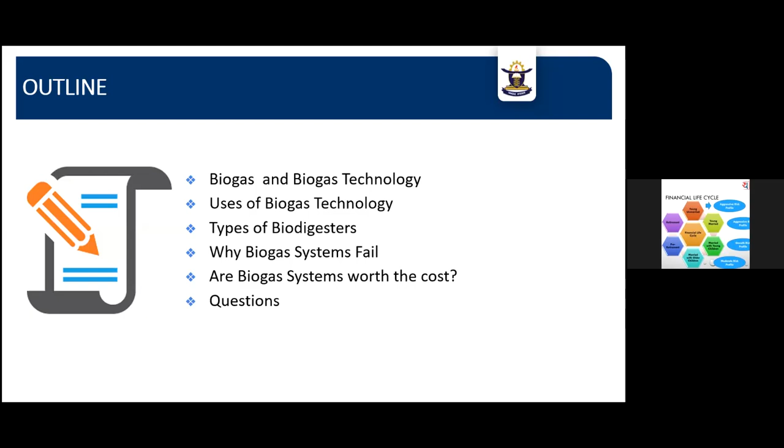And then we also want to see whether it is really worth it to put money into these systems, either as individuals or domestic users or as commercial users. These are some of the things that we'll touch on briefly today. So when we say biogas, what is it? Basically, as the name suggests, it's a type of gas that is produced from biomass. Bio represents biomass, and the gas means a gas that is produced from biomass.

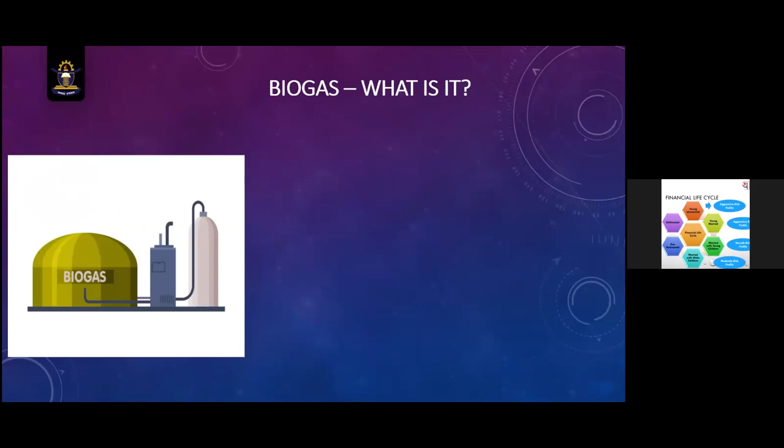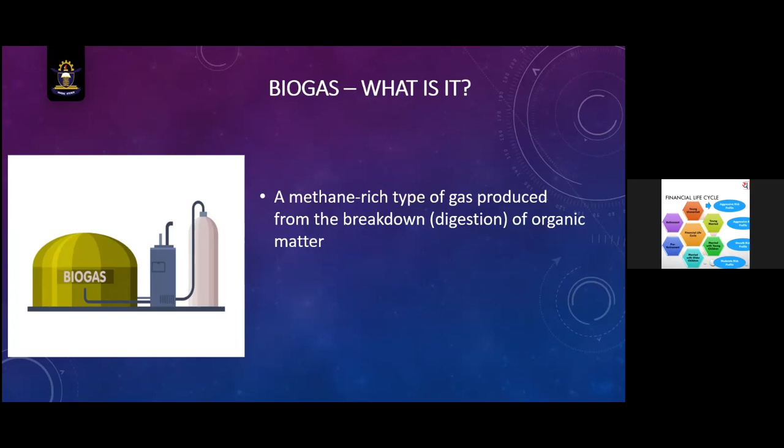Basically, it is a methane-rich gas produced from the breakdown, or what we call the digestion, of organic matter. Please pardon me for those who may not know methane. Methane is a hydrocarbon; those of you with a chemistry background would know that it contains 1 carbon and 4 hydrogens in single bonds (CH4). So it's a very rich gas that is used for combustion and a lot of other chemicals.

Naturally, biogas is colorless, and one of the quickest ways to ascertain the presence of biogas is the smell, a rotten egg-like smell. So normally where you have biogas, you have a smell similar to that of a rotten egg. Because it's colorless, you cannot see it. Naturally, God has made it possible for us to detect the presence of the gas through the smell.

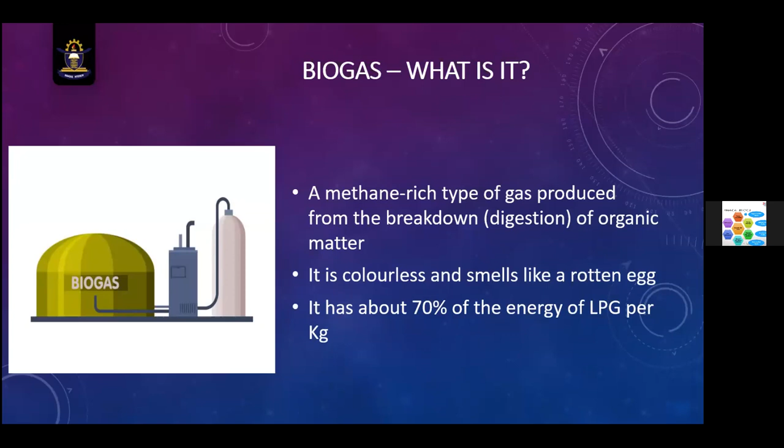If you compare it to LPG, with a very rich biogas that contains about 70-75% methane, the energy content per kilogram is about 70% of that of LPG. So it's a good gas that can serve a lot of energy applications for us. How is this produced? Before the webinar, I saw that Engineer Mubarak was playing a video, which is quite interesting, showing exactly how biogas is produced. But I would just want to break it down a little bit.

The process is actually a chemical process, or in quotes, a biochemical process. And so it involves several complex chemical reactions. I won't go into all of this. Laymanly, we'll say that it's produced when some group of microorganisms or bacteria break down organic matter.

And so when organic matter digests in the absence of oxygen, so we want the digestion process to happen where the environment is inert or where there is no oxygen, then the product of that process will be a gas and some other materials. So the gases that are produced, like I said, would be methane gas. You have some carbon dioxide, sometimes even some carbon monoxide, and other traces of gases, depending on the composition of the material or the biomass material that you have.

For us, for the purposes of using it for energy, we are interested in maximizing or optimizing the production of the methane gas, which is the key ingredient in there that is responsible for its energy application.

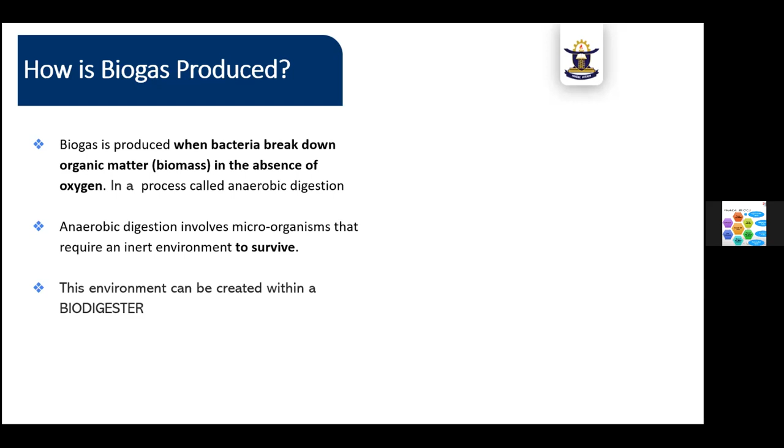So it's important that you create an environment that is what we call inert, or that is oxygen free, for the microorganisms responsible for the breaking down of the biomass to be able to do their work very well. And so normally this environment is created in a system that we refer to as a biodigester. And so the biodigester is just a reactor or a kind of container designed in such a way that air will not be allowed to enter, more or less, so that we can have the process of the digestion happening.

So typically, this is a typical digester that is usually buried underground. Of course, the reasons for all of this will be known later. So this is a very typical digester. So basically what we have here is just this portion of it.

Sorry, I don't know what I can see. Where's my pen? Yeah.

Okay, so this portion of it will contain our biomass, and it's designed in such a way that there will not be any oxygen entry. Okay, so as you can see, we have the digester itself with other ancillary parts or auxiliary parts. So we'll go into the details of this later on.

Now, the process involves a number of chemical reactions, as already indicated. And just to summarize what happens in there, if we take any typical biomass, we know that any typical biomass will contain some carbohydrates, some fat, and some proteins. And so there are about 4 different stages or 4 different kinds of reactions with unique or specific microorganisms responsible for each of these activities.

So we have the hydrolysis part, where we have the breakdown of the complex or the larger molecules to slightly smaller molecules, which are further broken down into smaller molecules, until we get to the methane, carbon dioxide, and then the other traces, where we have more or less almost complete reaction happening. So this is exactly what happens. But we are not going to go into the chemistry of this. Perhaps we can have another session discussing all of these quite complex processes happening here.

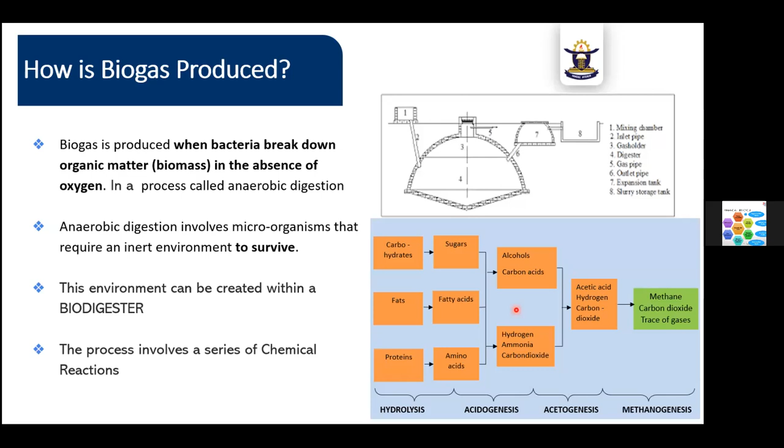All right. So what are the uses of the technology? Typically, the anaerobic digestion process is used for basically 2 things. One, you can use it to produce gas. If the production of biogas is the main goal, then it can be used to produce biogas. You can also use that same process as a waste treatment process. Okay, so you can use the biogas technology or the anaerobic digestion technology to produce biogas or to treat waste.

In fact, they happen together. They are not mutually exclusive. So what happens is that whether you want to treat waste, the biogas will be produced. Whether you want to produce biogas, some waste treatment will happen. But depending on your focus, you may design the process in such a way that you optimize one. Like I said, if the object is to produce a lot of gas for cooking or for energy application, then

you want to design your process in such a way that the production of gas is optimized. If it's for waste treatment, then you want to have a way that the pathogens within the biomass or within the substance that you want to treat are given the appropriate conditions to be killed or made inactive in whichever way you want.

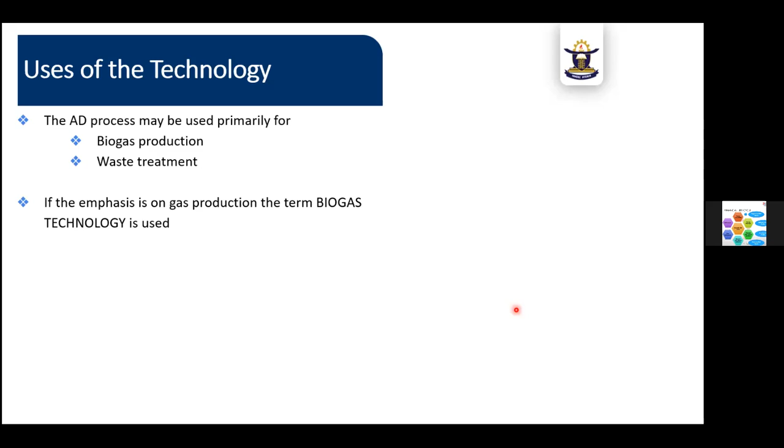So if the emphasis is on production of gas, that is where normally the term biogas technology is used. Biogas technology is one of the terminologies we use openly, and this resonates very well with systems that are used with the intent to produce some gas for further applications. If it's for sanitation or waste treatment, you may hear terms like anaerobic waste treatment technology, or anaerobic treatment technology. So they are all the same.

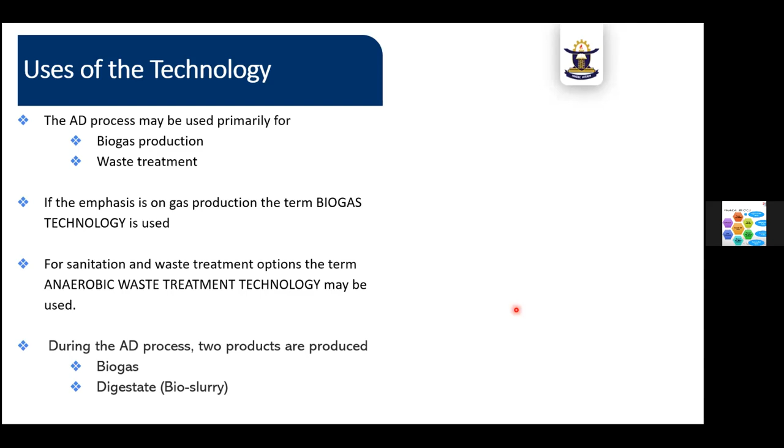Whichever technology you want to use, it is still biodigesters that are doing the work, depending on what you want to produce. During this process, you produce a gas, and then you produce what we call the bioslurry. The sustainability of an anaerobic digestion process is increased when you are able to make use of these two products. One will be the main product, one will be the byproduct. If you're able to make use of all of this, then you are closing the cycle. You are ensuring that nothing goes to waste.

So typically, assuming we produce some biogas in an anaerobic digester, you can use the gas in a biogas generator to produce electricity without any further treatment, maybe just removing some unwanted materials through filtration or absorption. You can use it to cook also. You can just burn it in a biogas stove, and voila, you are good to go. You can prepare some meal with it if you have enough gas. So you see the heat application also here.

Of course, in advanced countries or in advanced utilization, we can further refine it for various applications. You can use it even as fuel for transportation, for the generation of electricity and other chemicals. So there are very advanced usages as well. That will require some further processing.

And then, of course, the slurry or the digestate that I talked about can also be used as a very good soil enhancing material, or as a fertilizer. Many people will call it the biofertilizer. It is very rich in minerals that can be used for enhancing or enriching the yield of farmers. So we have a very complete system if we are able to use all of this.

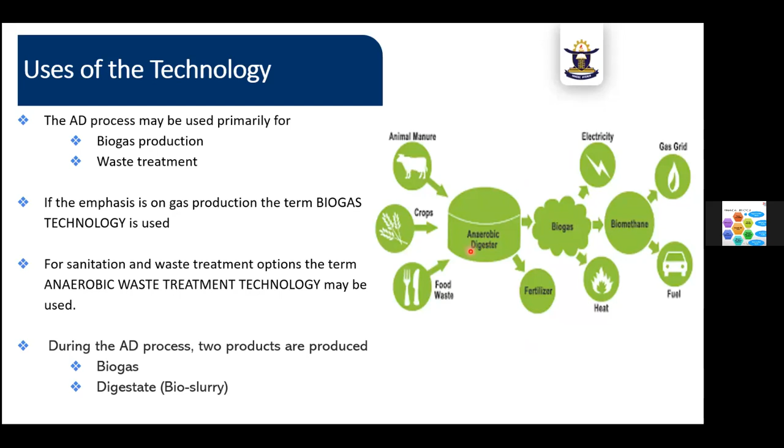But what is the situation in Ghana? In a survey that was done by Bensah, myself, and some other colleagues in 2019, we found that in Ghana, a lot more people install biogas for the purposes of sanitation. And energy, yes, about 60% of the people would want to use the energy. The energy usage is usually predominant among institutional or commercial facility users. For many households, the intent of putting up a biogas facility or anaerobic digestion system is to treat waste.

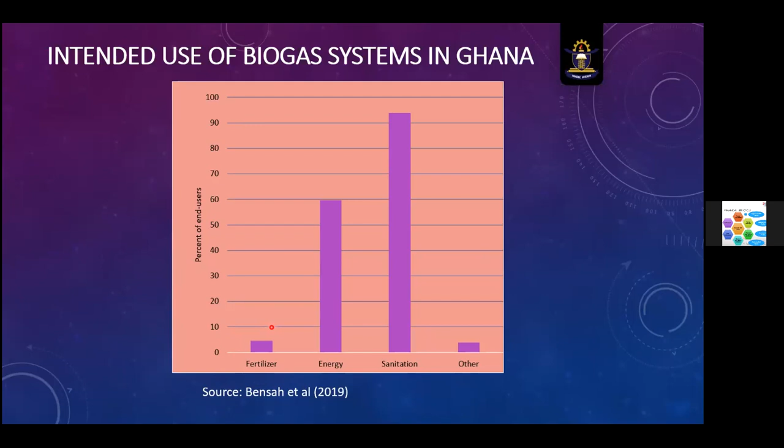Of course, the use of fertilizer is on a very, very low side. A lot of people just dispose of the bioslurry into the environment. And so based on this, we want to know what exactly will have to be considered when you are putting up a biogas digester. There are a number of factors, we'll just mention a few here, that have to be considered when you are installing a biogas. This will be very useful for installers. I know there are a lot of people who have interest in building biogas facilities across the country, but the chemistry behind this needs to be known.

If you don't know the chemistry, if you don't know the factors that actually affect the plant that we want to put up, we might end up failing and our businesses may go down, because when the end user doesn't find the benefits, of course, the person is not going to sell your technology to another person, and you might be losing out on market share. Okay, so we need to understand.

So one of the key factors to consider when putting up the technology is the temperature of the process. Okay, so the digestion process can actually be categorized into about 3 stages. We have what we call the psychrophilic process, where the temperatures are below 20 degrees Celsius. And so this is typically for the countries where temperatures can actually go very low.

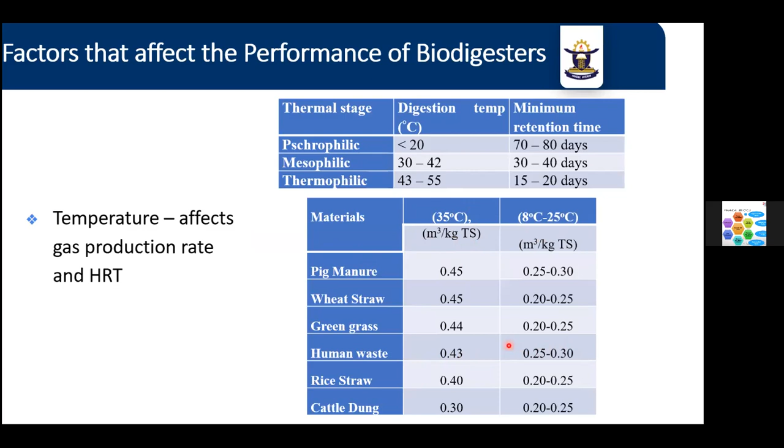I just want to show something also about the temperature. So you see that if the production of gas is the main goal, let's take for instance human waste. If you are operating at an optimum temperature of about 35 degrees Celsius, you are able to produce about 0.43 cubic meter per kilogram of the total solids within the human waste. But if the temperature is lower, of course the amount of gas also reduces. So this is something that we need to take into consideration when we are putting up a biodigester.

There's also what we call the hydraulic retention time, which I talked about, basically telling us how long our material should be in the digester before it is removed. And so this will affect the size of your reactor because it's basically a batch system. So if you have to hold a lot of material for a longer number of days, then you need a larger system, and it also affects the gas production rate.

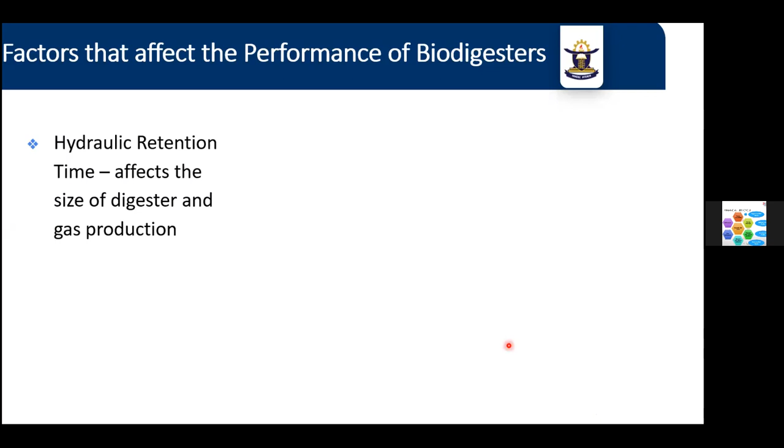If it's for sanitation, of course, you might need a lot more days. You make sure that all the pathogens are dead, particularly for human waste, which contains a lot of pathogens. So probably around 60 days to make sure that everything is dead before you release it to the environment.

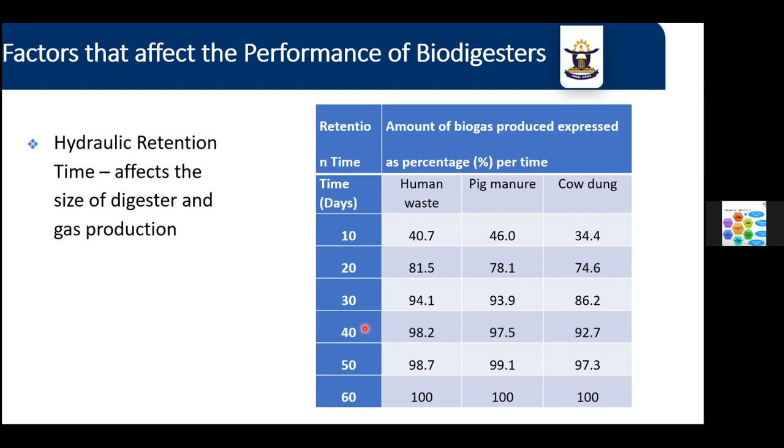All right. So then, of course, also the type of feedstock. Technically, any organic material is digestible. So you might be tempted to push in any material at all, but there are some guidelines. The very simple guideline is that you deal with what we call the soft organic materials. They are easily digestible: the cellulose and the hemicellulose, the softer part. If you are fortunate to get food waste, that is better. Manure from animals is somehow already digested, so that is better.

But peels, woody parts, branches, and all of that. In fact, I remember on one of our trips, we were inspecting some facilities and we had complaints of a system not working. We opened it up and it was full of plantain peels, cassava peels, and all of that. They will digest, but it will take a longer time. So if this is a system designed for 20 to 40 days, and you don't have the luxury to extend the number of days, you are choking your digester. Eventually, if you're not careful, it will die out and not produce any gas or not work as you expect.

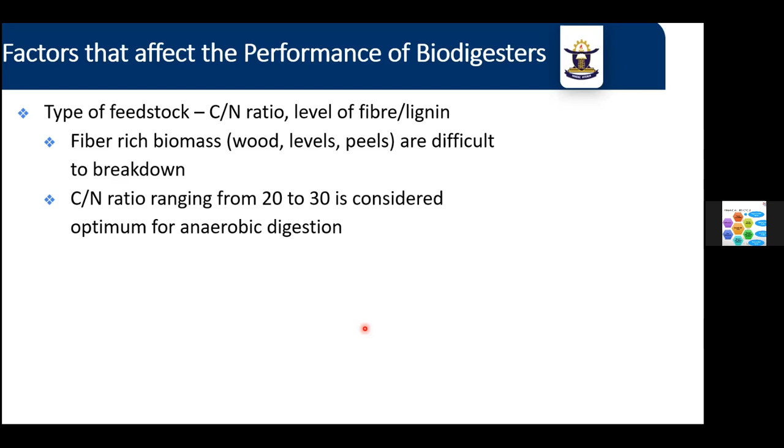Then, of course, the pH. Let me bring it down. By pH we mean the acidity or alkalinity of the system. Within the reactor, the safe operating pH level should be between 6.2 and 8.5. If you go below 6.2, you are killing the microorganisms. If your system is too acidic, the microorganisms will die. If it's too basic, they will also die. So we need to find a balance, and it's very important that we keep this balance.

One of the reasons, as we'll see later, that many of our household systems don't work the way we expect is because we use too harsh detergents. We are using Parazone or whatever to clean our WCs, because we want our homes to be as hygienic as possible. But in doing that, we are flushing this into the digester, and it's increasing the pH within the system, which kills our microorganisms, and eventually the system may not work. So an installer may do very good work, but just because of our operations, we may be killing the microorganisms and not achieve the result we should. And of course, how often you load your materials.

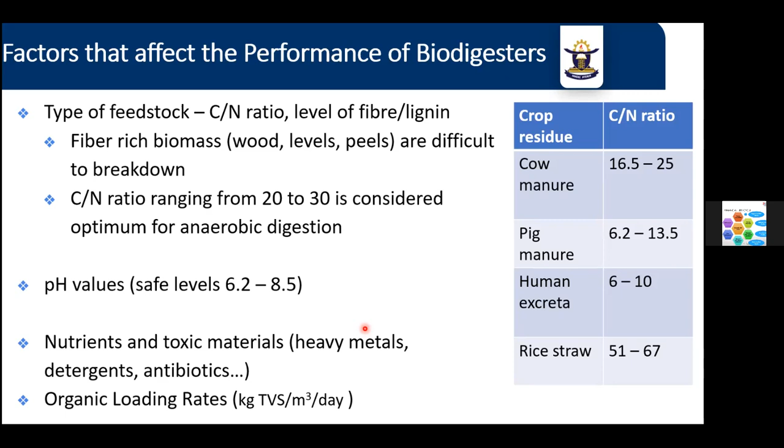Moving from there, we just want to show some pictures of the various types of biodigesters that we have. In fact, now technology is advancing. A lot of the institutions are putting up high-level digesters. Some of these include what we call the continuous stirred tank reactors that may not even have to be buried. There's a project we are working on now in the Kumasi area. We are putting up what we call the upflow reactor, or the UASB. Guinness Ghana has one, and a number of companies also have some of these high-level digesters. But the most common ones are what our artisans have been able to master over the years.

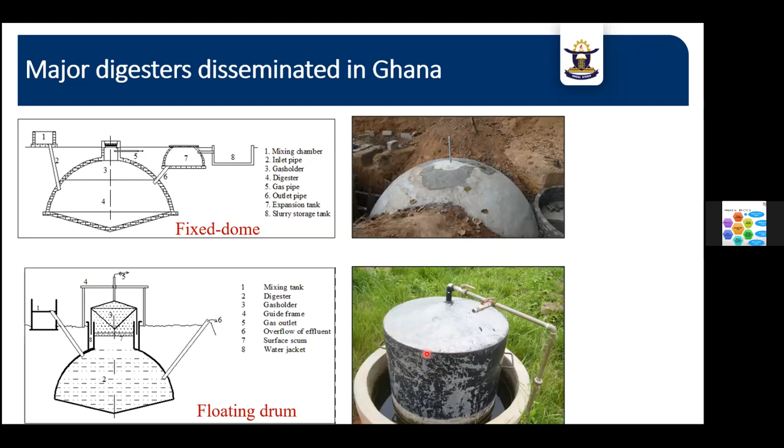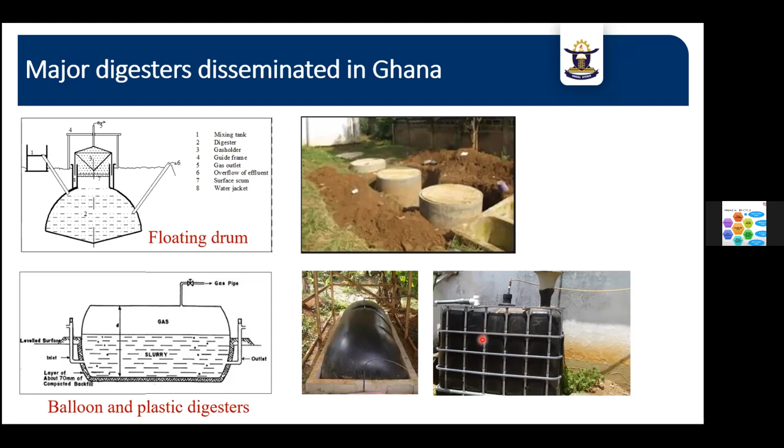So of course there are several different types, several different innovations, but generally in Ghana, per some work that we have done, we noticed that the fixed dome type dominates the systems in Ghana. In fact, many of our installers would be comfortable installing the fixed dome digester for you. So you can see almost 80% of all installations that we have in Ghana presently are of this type.

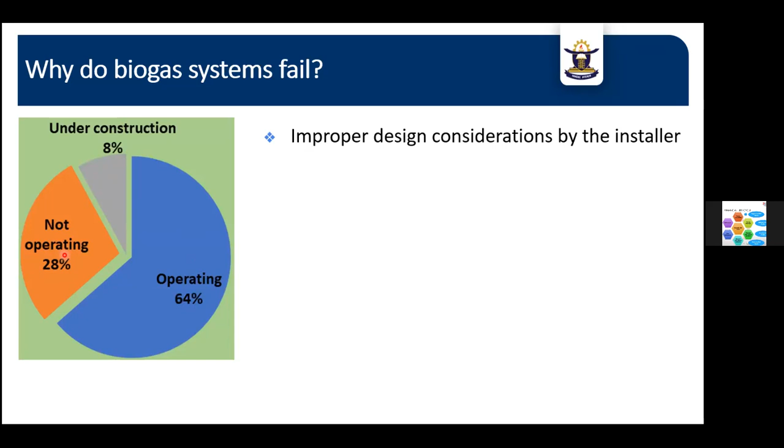And so you can see that still we have issues with high failure rates of our systems. But what are the causes, or the reasons behind these failure rates? So we tried to ask a few questions. We are not going to go very deep, but we have summarized them into about 2 major categories. One of the things that we found out was improper design considerations. And this is typically for the installers, and this is what the installers here need to pay attention to.

Sometimes our inability to understand the process, or our attempt to reduce costs by reducing retention time and not providing the appropriate temperature, could result in failure of our systems. If somebody wants the system to produce gas, they will want it to produce gas and be able to use the gas. So we need to really understand this. And of course, undersizing was found as one of the major issues, which results in the reduction of what we call the hydraulic retention time.

Then, of course, generally, we also notice that some of the constructions or installations are low quality. And so there are some systems that are cracked, and of course, that will result in leakages and all of that. And so we need to be very careful as installers.

Then on the other side, the end user side, we also notice that improper operation by the owners is also one of the major contributing factors to the failure of some of these systems. And of course, lack of maintenance. It's a typical Ghanaian culture. We spend so much money to invest into things, but we don't pay attention to the maintenance of these systems.

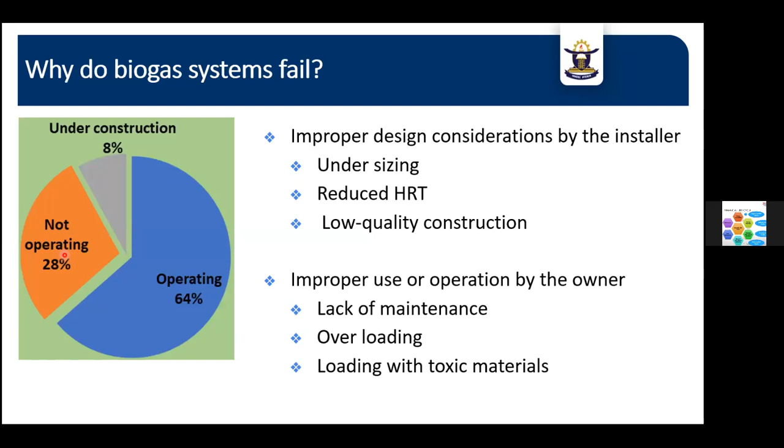All right. I think I still have a few minutes to wrap up. So we can look at what I call the financial viability. The technical term would actually be the economic viability, but economically, there are a lot of advantages of biogas, some of which we are not able to quantify in monetary terms. So we are dealing purely with monetary issues here. Is it worth putting in your money? If you put in your money, what are the consequences?

Of course, a lot of work has been done in this area. We have also attempted some work here, in the work we did for SNV Ghana, and we found out that for a typical urban household with a household size of 4. Now we are told that the average household size in Ghana is about 3.5, so the numbers are reducing, which is not very good for our biogas systems if you are going to rely solely on human waste or food waste.

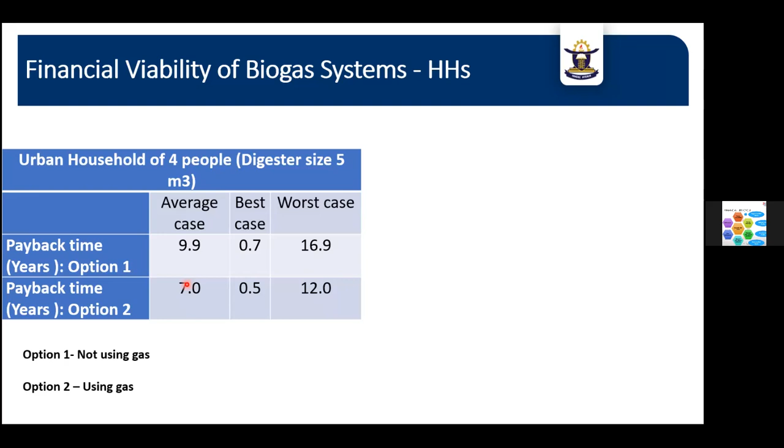And so if we don't want to dump untreated materials into the environment and we design a biogas system for our homes, within 10 years, you should be able to make back your money. And considering a lifespan of 20 to 30 years for a biodigester, I think that is quite a good investment to make, considering the returns that you'll be making on this. Okay, so you don't have any issue of having to call people to come and dislodge your waste and blah blah blah. That will be it. Right.

So now, typically, in terms of US dollars, a cubic meter of a biogas digester in Ghana will cost between 100 and 445 US dollars. So the 100 US dollars is the low band here, and this is what we call the best case scenario. Of course, there are some installers who are cheap, not very expensive. Some are also very costly, and so depending on your taste, you may want to get this. We have a list of many of them, so if you want to contact us, we can recommend some of them to you. But typically, this is the average cost of a cubic meter of a biodigester.

What we have also noticed is that for a larger system, larger than 10 cubic meters, the costs are usually reduced. So you may actually get a deal lower than what we have here. What we should also note is that the actual costs, and the reason why there's some variation, will also be dependent on a number of factors. So the guys will have to do an assessment of the land to see the water table, a whole lot of things we have to take into consideration. So the actual cost will normally be dependent on factors such as the site characteristics, the materials of construction, the cost of labor within your particular vicinity.

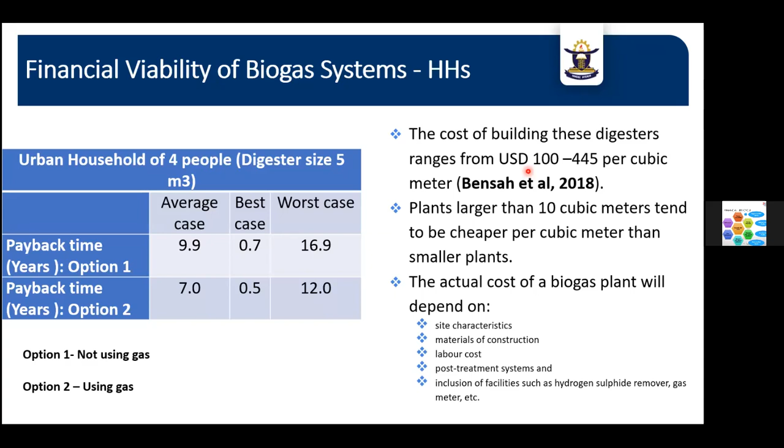Okay. Now we also did some work for commercial entities. These are large farms in Ghana, and this particular one is a very large oil processing mill in Ghana, and we were invited to do some work for them. You will notice that the simple payback, if they should invest in biogas for the treatment of their effluents and for the purpose of generating electricity, in fact, in less than 2 years, they will be making back their investment.

All right, so you can see that even for commercial facilities, depending on their unique conditions, this one here is a piggery. It's a very huge pig farm in Kumasi. They also have about 2.3, and there's another one here, which I think is a poultry farm, about 7.2 years.

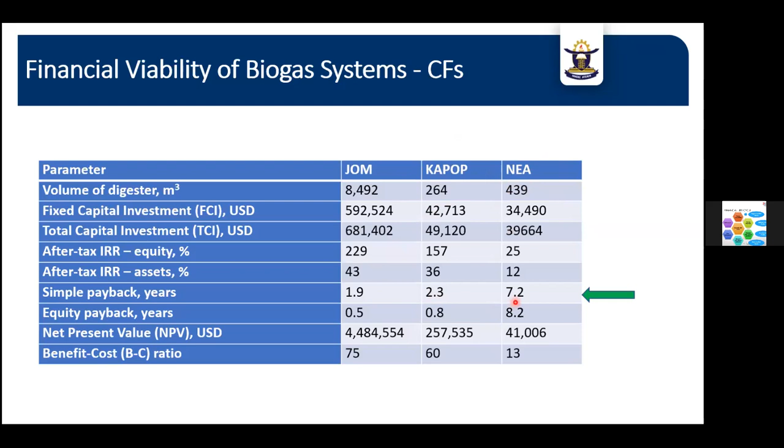So depending on your specific or unique situation, the figures here show that they are quite positive for us to invest into. All right, now, what is the technical potential of biogas digesters in Ghana? So this is just a very brief summary. And I think this is going to the policymakers or the government functionaries here.

In fact, what we need to understand is that as a country, we have not been able to fully harness the potentials of biogas. We have so much potential, but we have not been able to do that. In fact, I remember we made some recommendation of even designing what we call a national biogas program. Some countries have done this. We need to even have some regulation within the system, or have a regulator within the system, to control the quality of installation and all of that. I know EPA and the Energy Commission are up to something. Hopefully, very soon something will come up.

But if you take a typical household system, this is for urban areas, solely on human waste and kitchen waste, for waste treatment, or as a replacement or substitute for septic tanks, we have about 150,000 systems that we think can be installed across the country. And this is huge in terms of numbers, considering the number of installers that we have. In fact, we might need to do a lot more training to be able to tap into this. And that would probably yield about $56 million US for these people who may be involved.

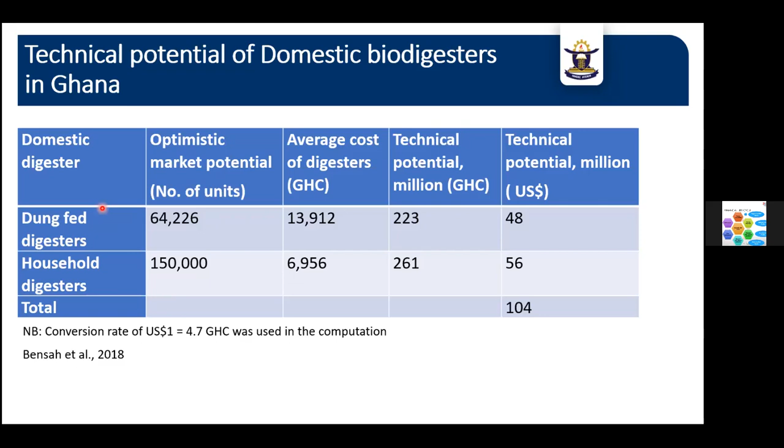And for the rural or peri-urban settlements where we have some households that have some farmland, or have some cattle, livestock, we are talking of dung-fed systems. About 65,000 systems can also be installed, and I see the greatest potential in terms of gas usage, but these are the people mostly in the rural areas. We also know that their energy sources are usually from the forest, firewood or charcoal, biomass. And so having biogas as a replacement will have several other economic and social benefits for these people. So basically, this is what we have.

As a conclusion, I want to bring this to an end for further discussions. We believe that biogas systems are good alternatives to septic tanks for night soil treatment. Fortunately, there are some innovative systems coming up that we just need to be sure of their quality, and I'm sure the costs may be lower. Of course, they have a reasonable payback time of up to about 10 years. So if within 10 years you're able to pay back whatever investment you put in, I'm sure that will be good value for money.

The challenge, however, is that the upfront cost is quite huge. Typically, you'll be in the region of 2 times plus higher than that of a septic tank. And so if it will cost me, let's say, 10,000 Ghana cedis to put up a septic tank, probably I should be looking at about 30,000 to do a proper biogas system. And that's maybe a little prohibitive for a lot of people, looking at how much you need to put in there.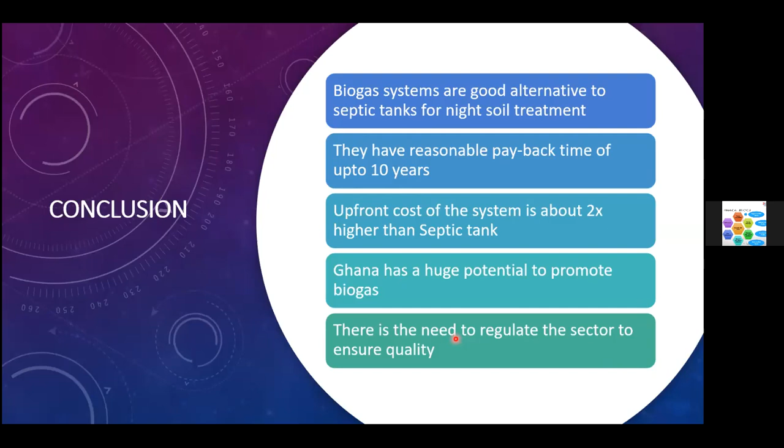Ghana as a country has potential to promote biogas. And I know that the Biogas Association of Ghana is doing a lot of work to promote the sector, also to ensure that there's quality within the system, which is what is required. So we need to regulate the system. That's how we have done for solar and other renewable energy resources. Let's be sure that those who are putting up these systems for people understand exactly what they are doing, and are able to be tracked if they fail to put up a good system, and be reprimanded accordingly. So this is where I want to bring the session to a close. Thank you very much for listening.